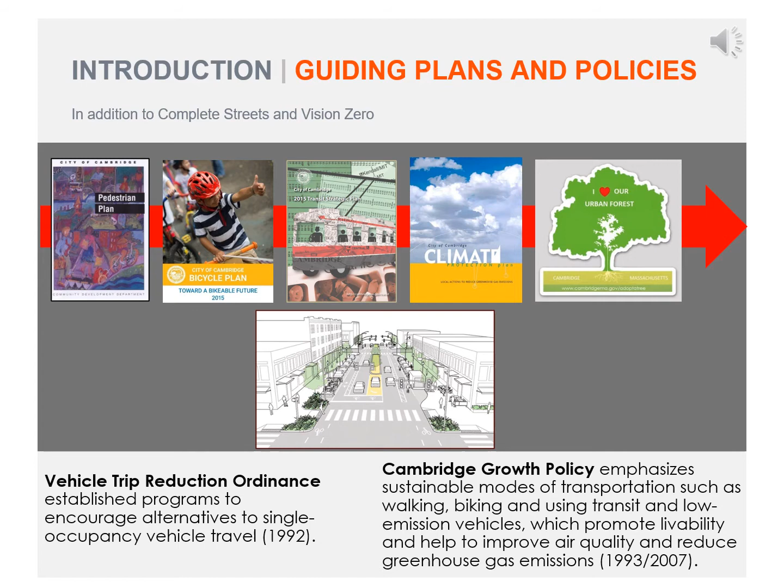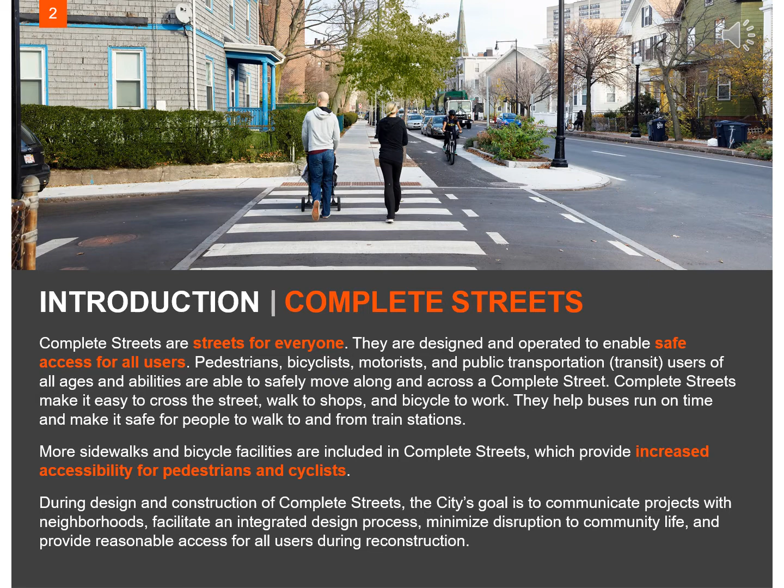The Massachusetts Department of Transportation Complete Streets program. A complete street is one that provides safe and accessible options for all travel modes, walking, biking, transit, and vehicles, for people of all ages and abilities. Vision Zero. Adopted by the City Council in 2016, Vision Zero calls for the elimination of fatalities and serious injuries resulting from traffic crashes.

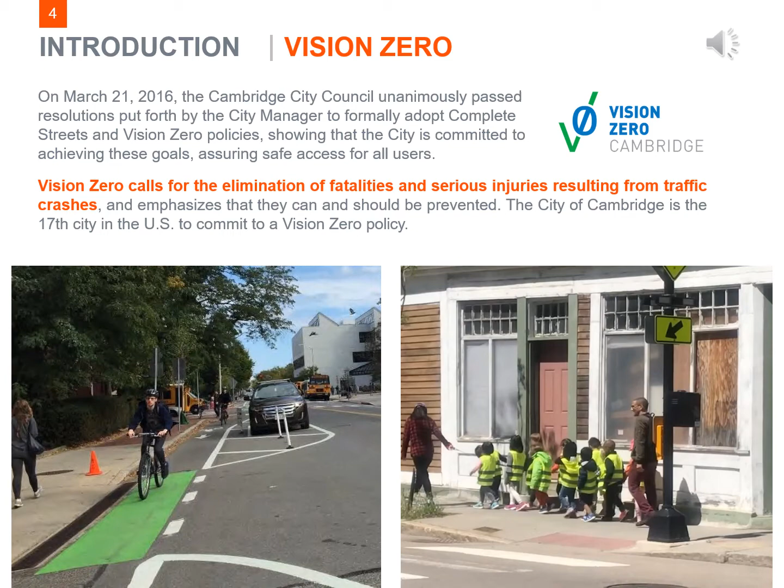This slide also shows some of the typical tools we use on narrow residential streets. In regards to sidewalk access, when it's not possible to get the required sidewalk clearance, which is 36 inches, on the house side of a large tree, we can interrupt the parking lane and provide a sidewalk on the street side of the tree to make the sidewalk accessible.

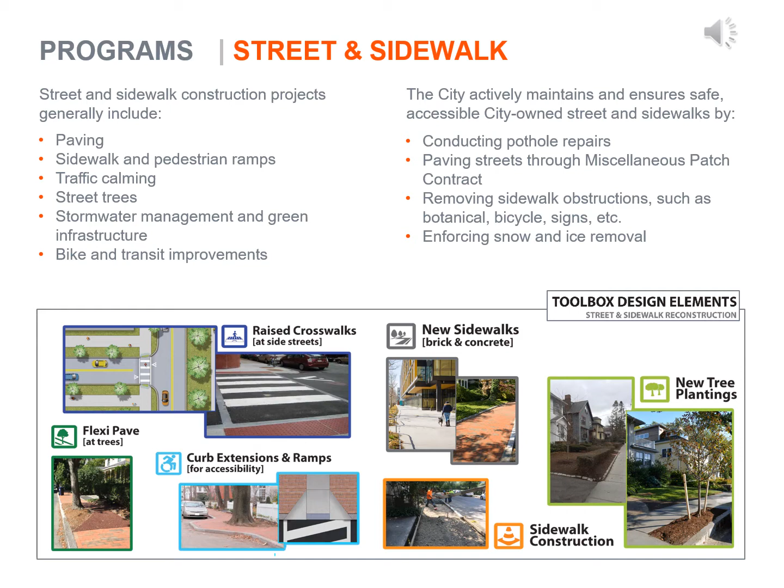At tight intersection corners where it's difficult to fit in a typical pedestrian ramp, we can construct a modified raised crosswalk. This has the advantage of eliminating the need for pedestrians to ramp up and down, and also has the benefit of slowing vehicles as they turn in and out of residential streets.

Our policy is to replace sidewalks in kind with the same material, although we do contact property owners to see if they would like a change. We also give special consideration to materials when a project is in a historic district, or if it's a larger project along one of the city's main corridors, where a more uniform approach to materials may be advisable.

When brick is used, our standards call for replacing older molded brick, which has uneven shapes and wide joints, with more uniform wire-cut brick which fits together tightly.

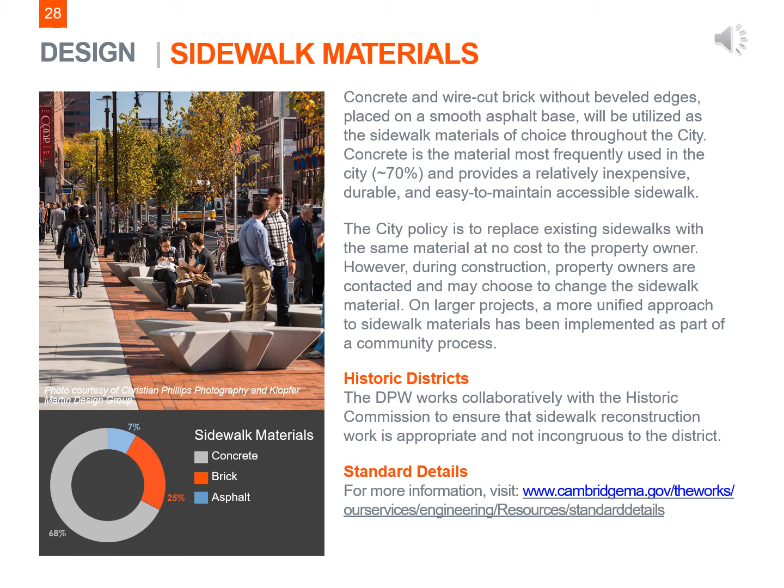Green infrastructure, or GI, is a part of our effort to improve the quality of stormwater before it is discharged from the local drain pipes to the Charles River or Alewife Brook. GI refers to a variety of techniques which use natural processes such as selected plants and soils to promote infiltration of stormwater into the ground, or to remove pollutants such as phosphorus from stormwater.

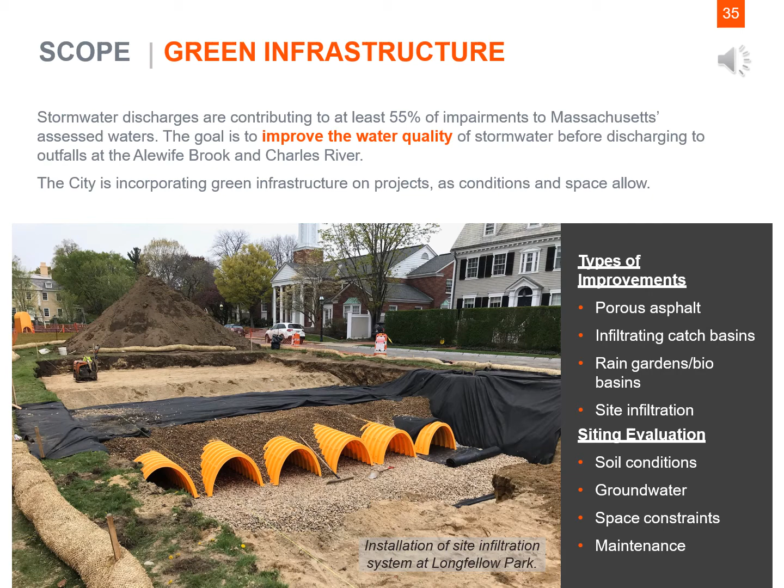The city has successfully implemented GI in a variety of roadway projects, ranging from major corridors to residential side streets. We are committed to incorporating these types of environmental improvements into smaller projects as conditions and space allow.

Design bike facilities. The goal is to enable people of all ages and abilities to bicycle safely and comfortably throughout the city. The plan provides a framework for developing a connected network of complete streets, but does not provide specific designs for individual streets. The designs are developed as part of a specific street design project.

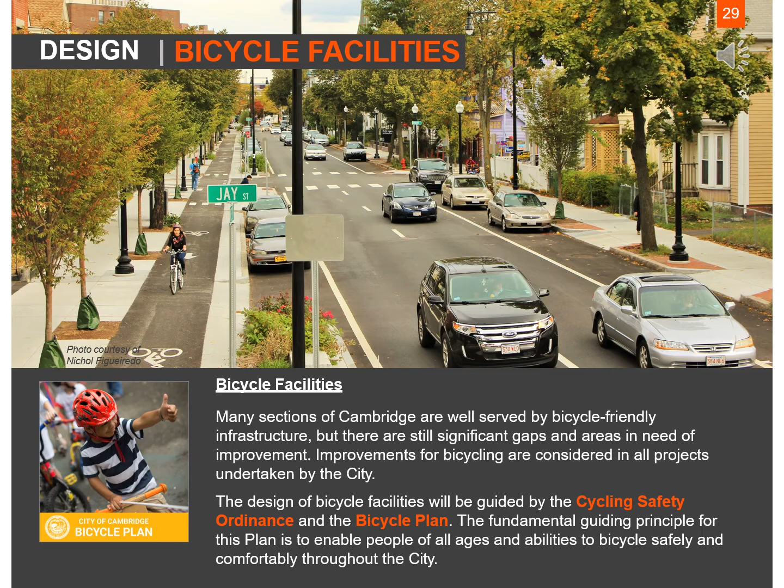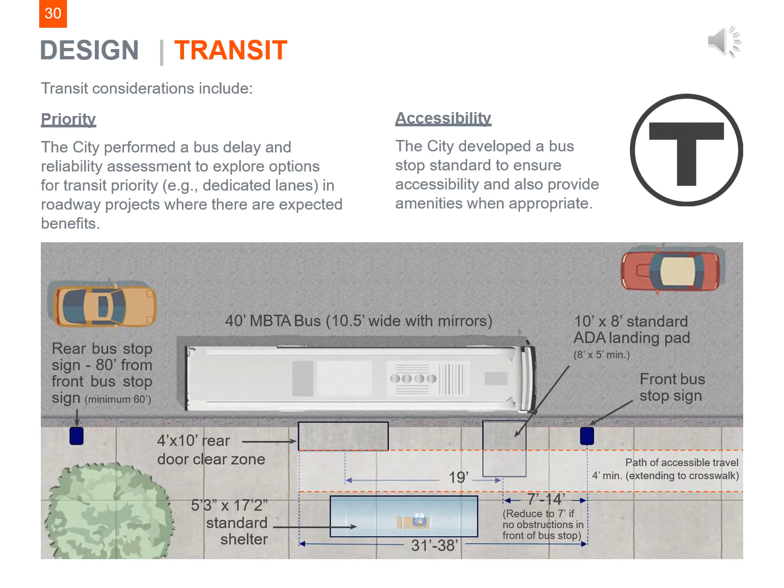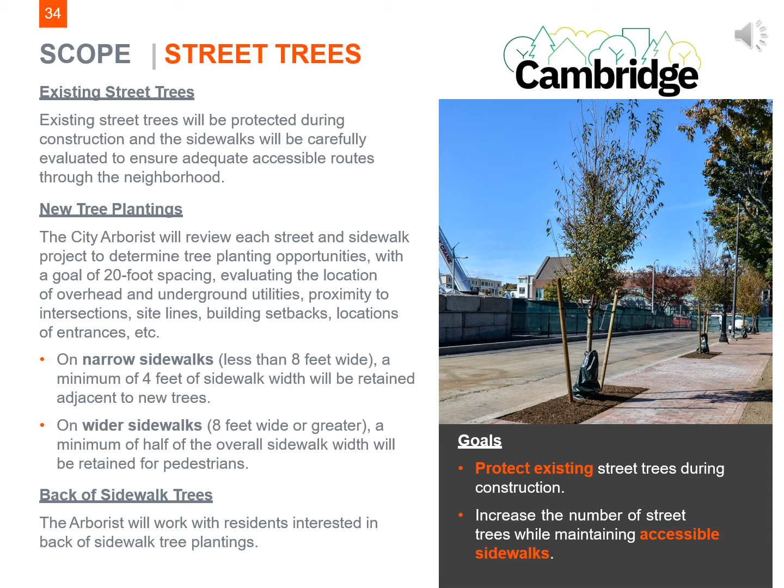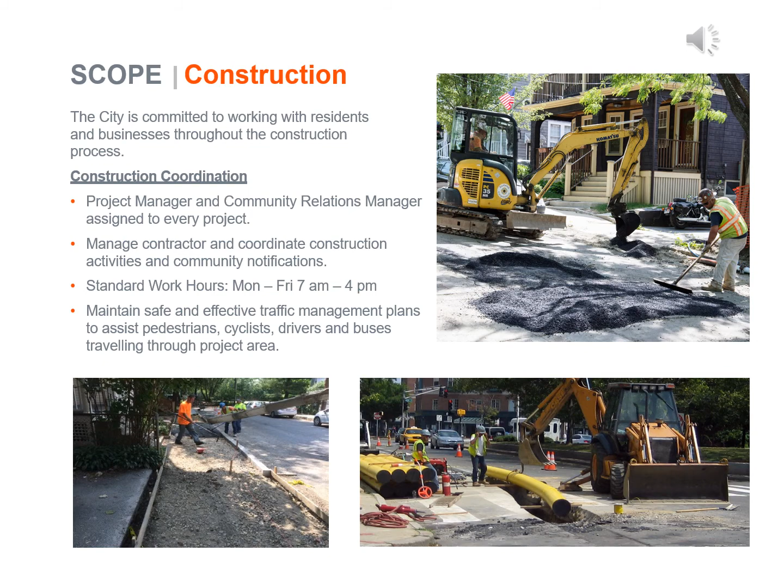This project is in the early planning stages, therefore a detailed schedule has not yet been developed. The next step is to hold a second community meeting once conceptual design plans have been established. At that meeting, residents will once again be asked to provide feedback. The city values feedback from those who experience the street on a daily basis.

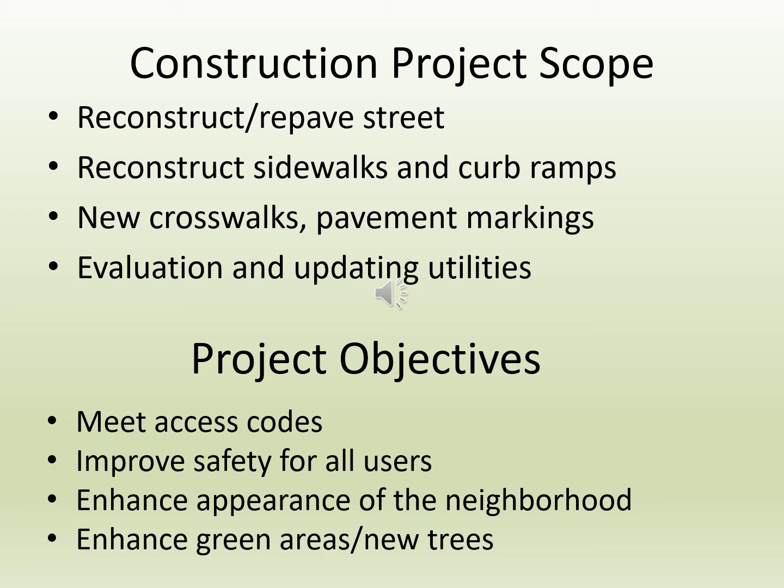After viewing this presentation, please send all comments and questions ahead of the November 3rd virtual meeting to Kate Riley at kriley@cambridgema.gov. There will also be time for comments at or after the November 3rd meeting. In addition, if you'd like to be added to our email list for project updates, please visit the project page listed at the bottom of the next slide.

We hope you will join us at the virtual community meeting on November 3rd at 6:00 p.m. At that time, this video will be played at approximately 6 p.m. with the live Q&A session starting immediately after.